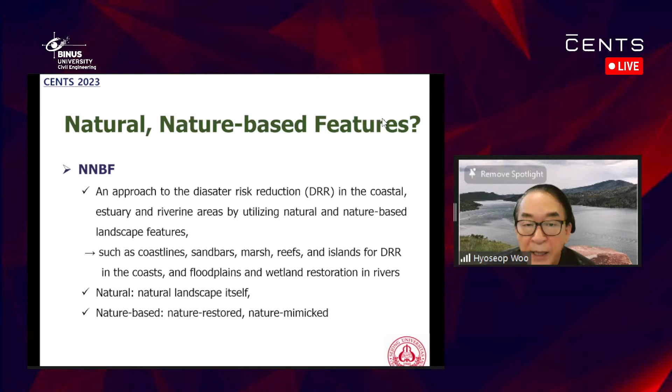And then, what is NNBF? I think some of you have already heard about this, but not all, because it's a very new concept introduced to us years ago. It is an approach to disaster risk reduction in coastal, estuary, and riverine areas by utilizing natural and nature-based features. In this case, 'features' means landscape features, such as natural coastal lines, sandbars, marshes, reefs, and islands for disaster risk reduction in coastal areas, and floodplains and wetland restoration in riverine areas.

So in these two concepts, we have two similar but different words. One is 'natural', the other is 'nature-based'. The first is natural landscape itself, and the second is nature restored or even nature mimicked.

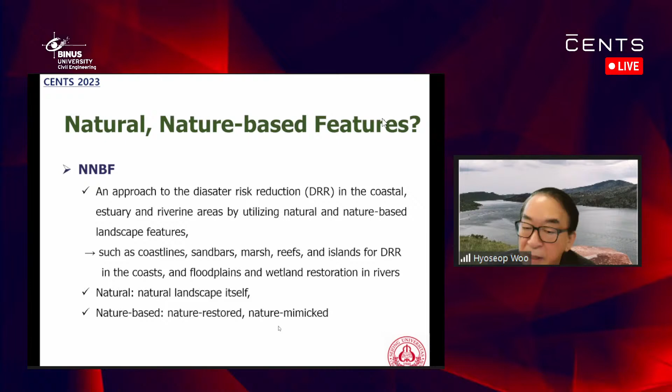Now the background of these two concepts. NBS, as I told you, was formally introduced in 2008 by IUCN, but its origination goes back to the 1990s, such as the 1992 Rio Environmental World Summit, where they accepted Agenda 21 regarding water. Then we had the Millennium Ecosystem Assessment over 5 years, and this concept was introduced in 2008. On the other hand, NNBF was introduced officially in 2021, jointly by the United States, Netherlands, England, Germany, Ireland, and the World Bank - so a very new concept.

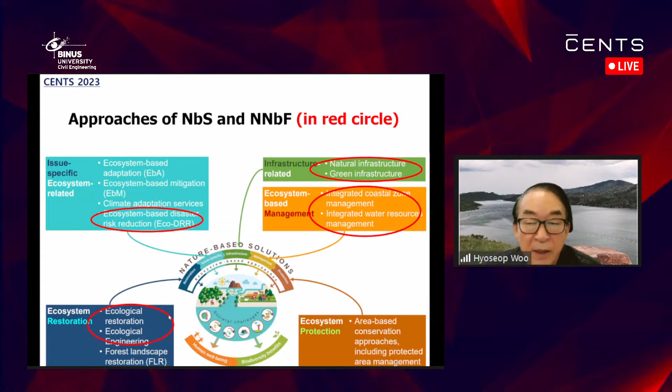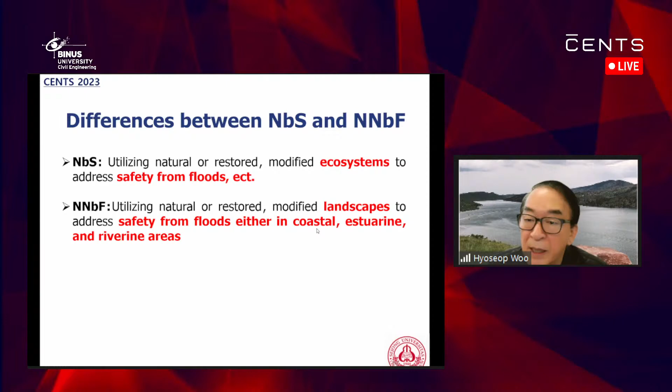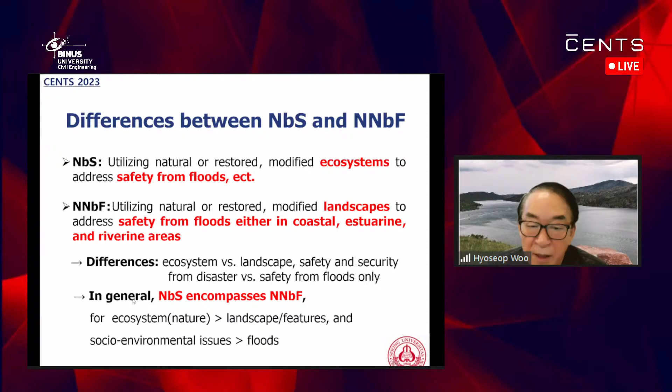I'd like to explain the differences and similarities between NBS and NNBF. NBS is the utilization of ecosystems, natural or nature-based, such as restored and modified, to address safety from floods and other social or environmental issues. But NNBF only focuses on water issues, flood issues, either in coastal, estuarine, or riverine areas. So the difference: NBS deals with ecosystems broadly, NNBF deals with specific landscapes. NBS focuses on safety and security generally, but NNBF only on safety from floods.

So I may say NBS in general encompasses NNBF. I'd like to spend less than 10 minutes introducing various concepts that already exist and sound similar to NBS and NNBF, starting from ecological engineering and even close-to-nature river work techniques.

A similar concept is ecological engineering. This is not a practice but an academic discipline started in the 1960s in the United States. A typical example dealt with in this discipline is constructed wetlands like this, and green roofs. I won't go into further detail.

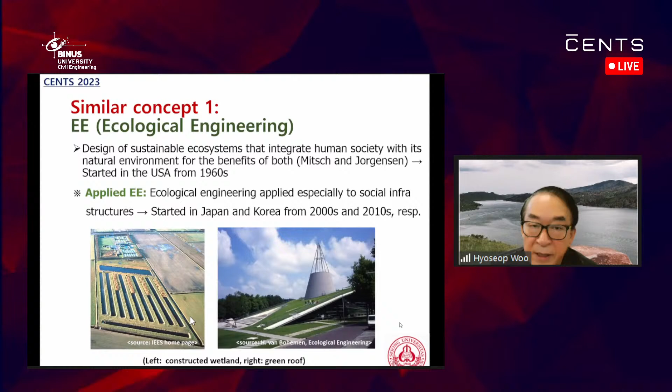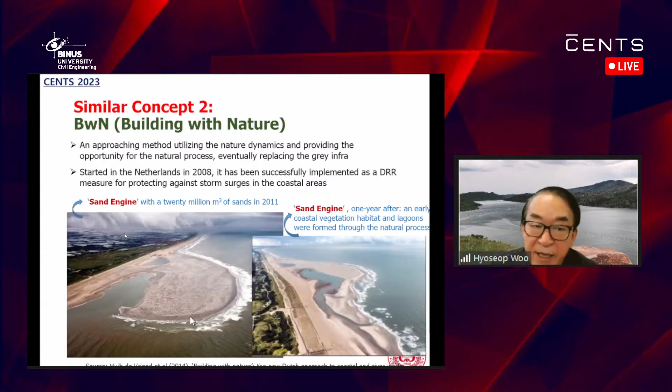Second, a similar concept is BWN, Building with Nature. Look at this - this is a Dutch practice. Instead of spreading beach sand along the coastline to protect it against storm surge, they put a huge amount of sand delivered from the deep ocean. Then natural wind, waves, and even storm surge spread this dump of sediment along the coastline. So they call it the sand engine. This is another practice.

Then there's a well-known concept, green infrastructure. But there are two distinct meanings of this term. One, the narrow meaning, is how to treat storm water in quantity and quality using nature-mimicking processes such as bioswales, permeable pavements, green streets, etc.

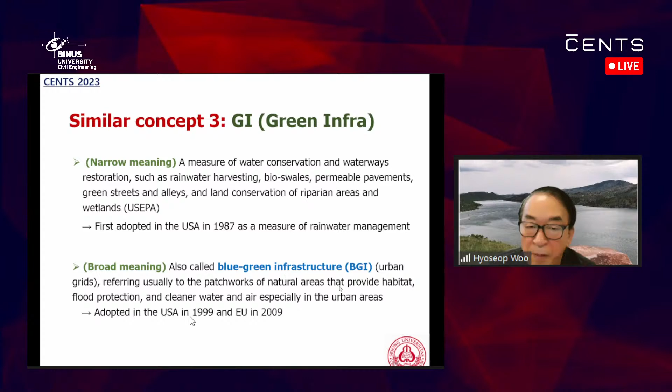If I expand the meaning of green infrastructure, we can also call it blue-green infrastructure - a patchwork of natural areas that provide habitat, flood protection, and more, especially in urban areas. I'd like to explain this with a relevant diagram showing examples of green infrastructure applied in urban areas, and the patchworks of green areas and blue areas. You have a built environment, urban areas, and a natural environment, and they try to integrate these through patchwork networks of green and blue.

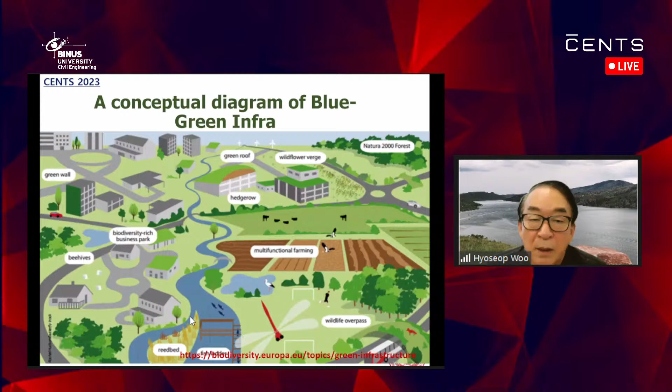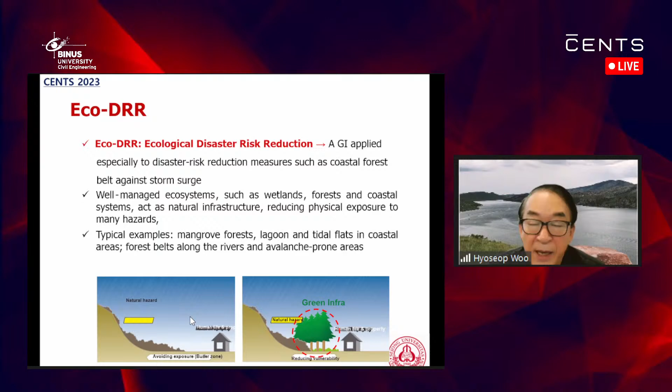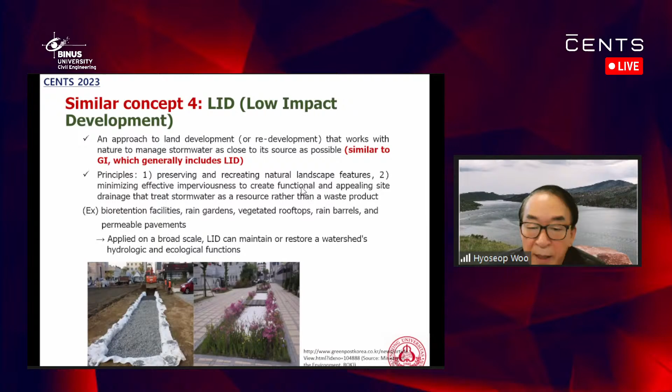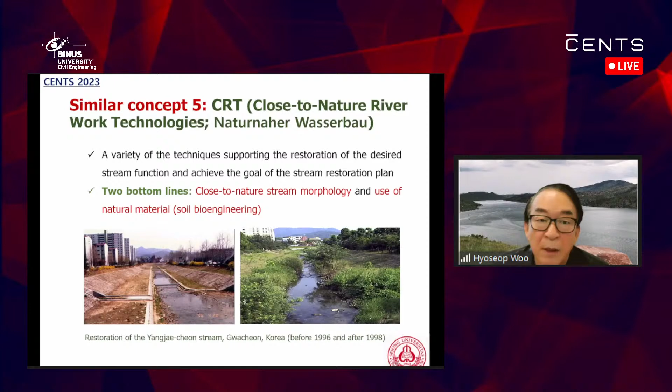I'd like to show you briefly numerous examples of different spectrum, different categories. In this case, I'll focus on NNBF.

We're trying to get some points. Can I continue? Yeah, sure.

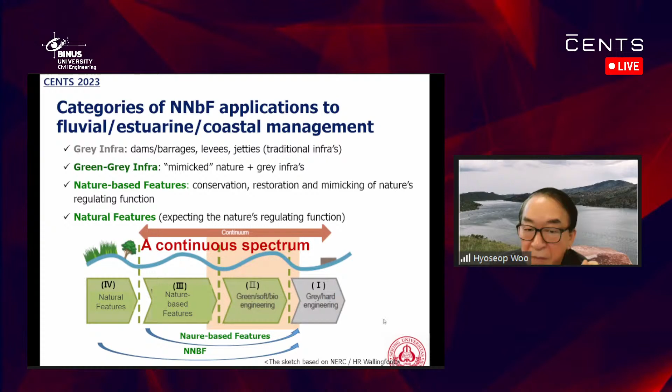Then eventually we can consider the last category, natural features. So if I consider these three, we can say nature-based features. But if I combine natural itself, then all of these are NNBF, natural and nature-based features. So there are four categories: 1, 2, 3, 4. I'd like to explain some examples for each category. This categorization should be continuous, not cut — I'd say a continuous spectrum.

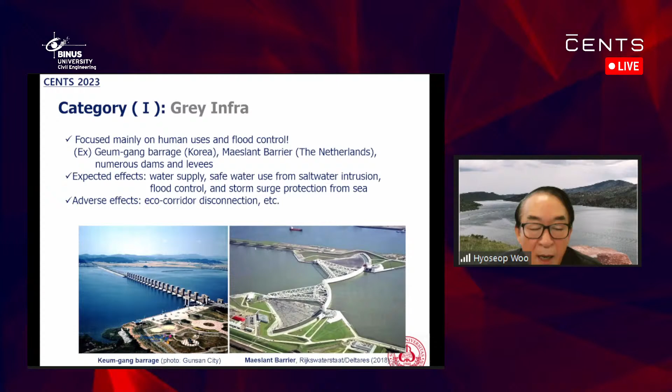This is a good example. You know that it's in category 1, gray infrastructure. We can make, by high tech and engineering technologies, this kind of barrage in Korea and in the Netherlands.

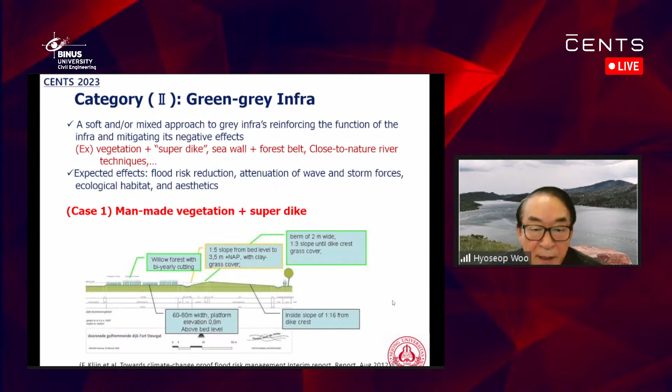This is another example found in Korea. Here we have a breakwater and dikes to protect the inside against storms. Then, in addition, we make this kind of tree corridor, forest corridor, like in these real pictures, so that even some parts of storm water could overflow this levee. This forest belt can protect the inside urban areas by absorbing the overflowing storm water.

You see, this is all practice in Korea. They also made this kind of coastline forest belt to protect the inside, in this case paddy land.

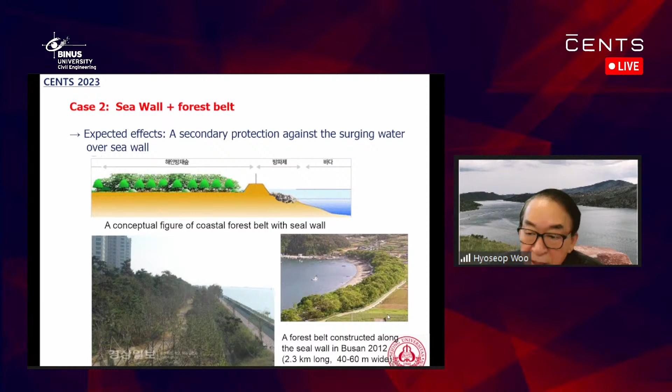You see another example, eco DRR. I already explained this one — this is where they planted trees on the levee, Ulsan levee, to protect it from erosion. It was 400 years old, and even then they planted trees like this.

This is a cluster, not a corridor, planted to protect villages located here against the straight coming flood torrents during flood times. This is a 1,000-year-old practice.

Case 4 is close-to-nature river works techniques. This is German practice: instead of concrete revetment for protecting the stream bank, they use living material — willow trees, this and this.

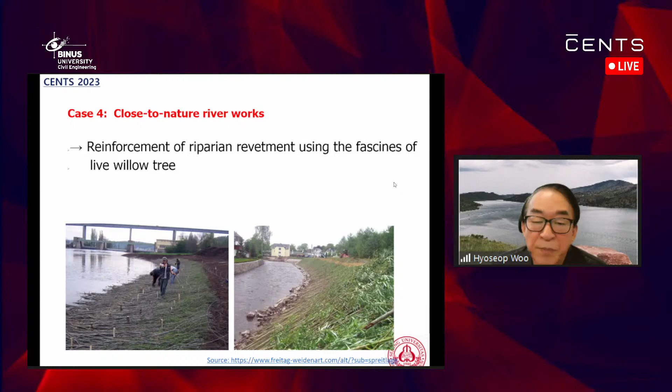And this is a very common practice in Korea. So we have this to this. Then category 3 is nature-based features.

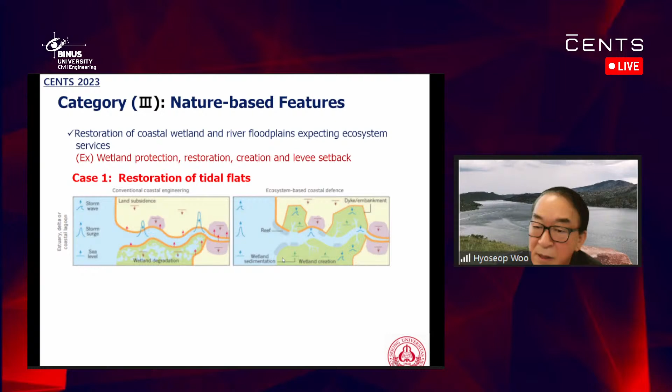One example could be found in restoration of tidal flats. You see, they made a seaside dike at the estuary river into the ocean, but because of these dikes the channel narrowed, and storm peak could increase because of this narrowness. Instead of this, they set back the levee backward like this, and even removed the levee here to absorb the storm surge peak, so that at the same time they can expect habitat functions from this restored wetland.

This is an example of category 3, and this shows the actual views of that practice.

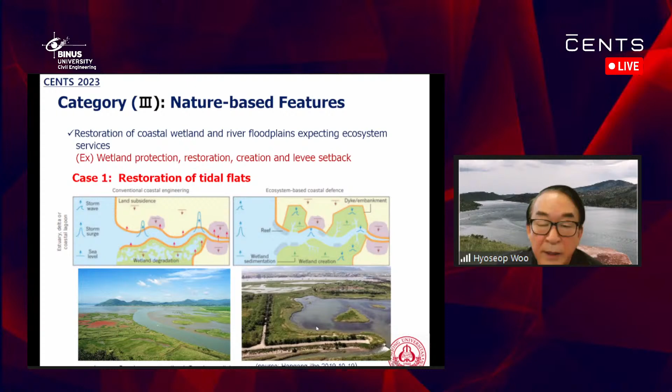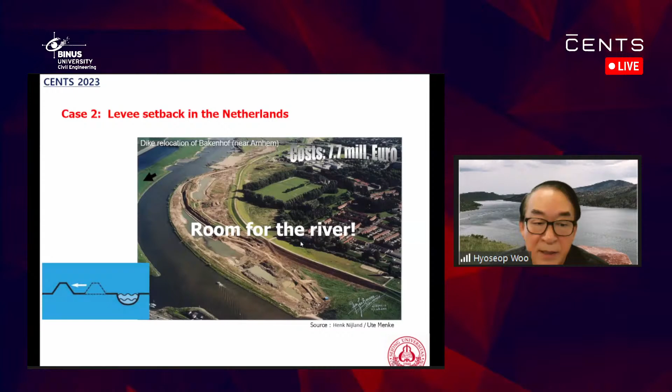This is a setback. Levee setback is very common in Europe, in the Netherlands. There was a levee here; they set it back to this place so that they could restore this floodplain. This is a good example of their practice — the Room for the River, a very well-known practice from the Netherlands.

This is the same case, levee setback, but in Korea on a small scale. We may also consider removal of levees. For example, we have a small stream here where they constructed a levee on both sides. This portion of the levee is only for this small, narrow paddy land. By removing this levee, they can make more room for the river and also restore this land, which was originally part of the floodplain.

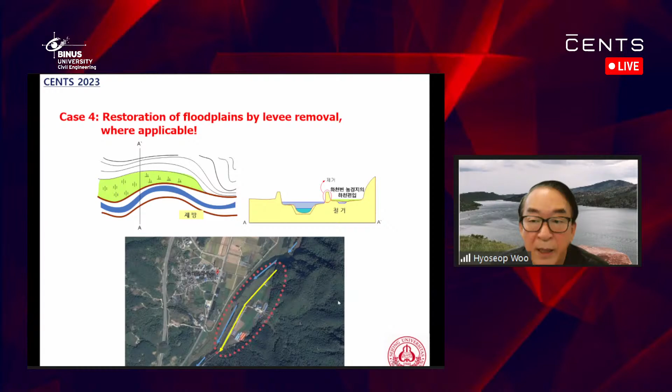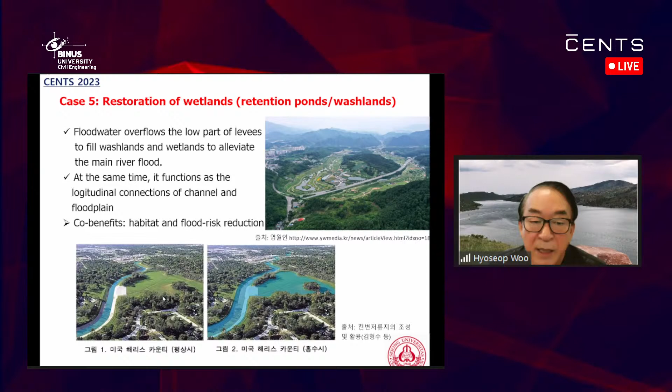Then retention ponds, so-called washlands, are important. This is actual work in Korea, and this is another example in the United States.

The last category is just conservation of nature itself to get benefit from that nature — natural features. This is a good example of a mangrove forest belt; many of you already know this, perhaps better than I do. In 2020 we had cyclone Amphan, and because of this mangrove tree forest belt along the coastline, they had less damage than expected.

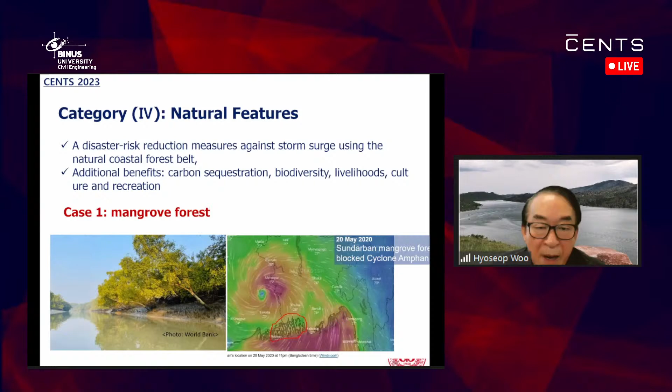Those without mangrove tree forest belt.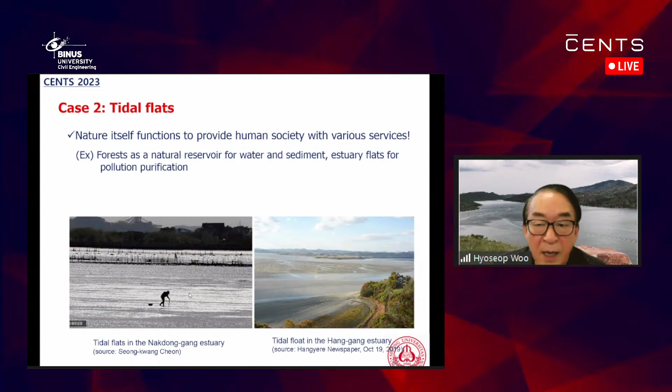And then tidal flats are also important. It's a part of coastal lines, but by conservation of this tidal flat, we expect benefits in terms of flood alleviation. And this is a good tidal flat in Korea, and other pictures in Korea.

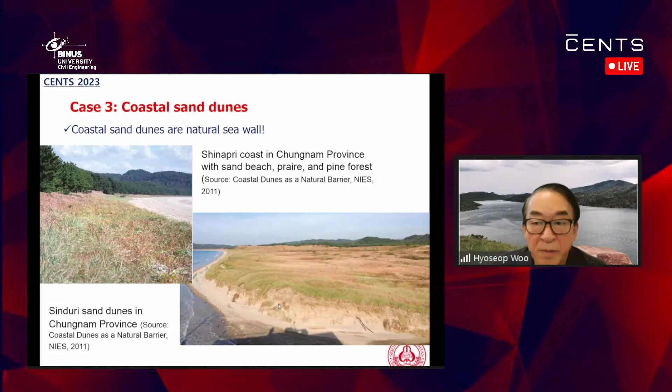Even coastal sand dunes are important to protect. Look at this. This is sand dunes on the west coast of Korea. This is another sand dune on the west coast of Korea. And this is a good diagram showing how useful natural sand dunes are along the coastal line.

Suppose we have an artificial retaining wall here. It's very susceptible to being destroyed by storms because the foundation itself is naturally very weak. So it could end up like this. But when you consider the natural sand dune, it's very flexible, so that once it is modified or changed in shape, it could be restored. This is an example in Korea of destruction of a retaining wall by the action of waves and storm surges.

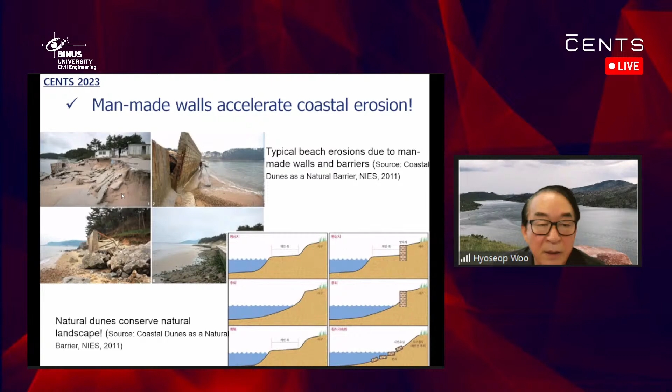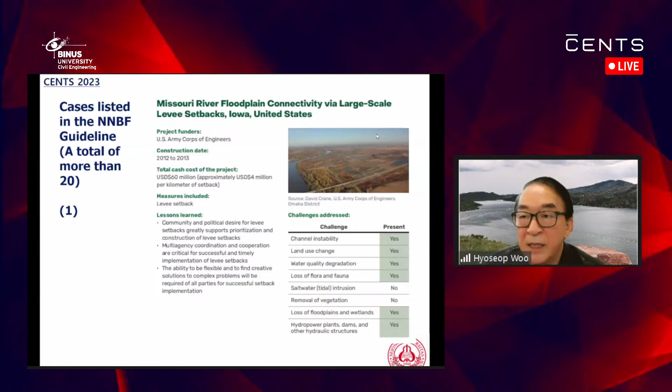There are many other examples which you find in the NNBF guidelines. This is one example of a levee setback in the United States. And this is another example, a side channel construction in the Netherlands, to provide flood protection as well as habitat restoration co-benefits.

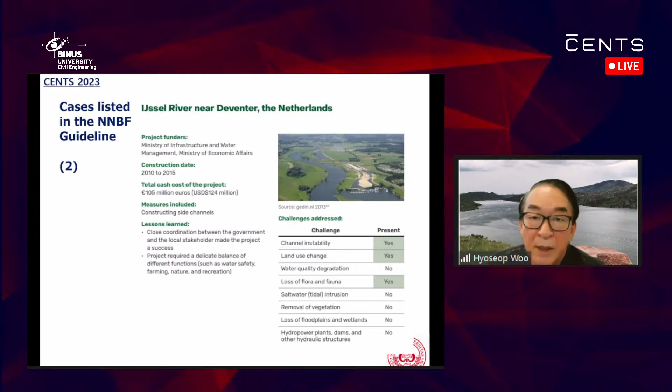Okay, I think we've spent half an hour, so I need to conclude my speech this time. Again, NBS is an umbrella concept where we harness natural processes and ecosystem services to address our social and environmental challenges in the water sector, actually in every sector. So I may say all approaches based on nature — in this case, nature means ecosystem — are nature-based solutions.

On the other hand, NNBF, natural and nature-based features, is the utilization of natural or restored or modified landscapes to address safety from floods. We focus only on safety from floods, either in coastal, estuarine, and riverine areas. NNBF was newly introduced in 2021, but the core concept is not new. So we may say NNBF is a good subset of NBS.

We may consider there is a continuous spectrum of river and coastal line management in terms of flood protection. First we used gray infrastructure, then green plus gray infrastructure, but still we need to use nature-based features, and eventually we need to protect and conserve nature itself, natural features. In most cases, NNBF shows better efficiency when aligned with conventional gray infrastructure. So in our civil engineering discipline, we still need to learn more techniques, technologies, and science for how to design better infrastructure using so-called gray methods.

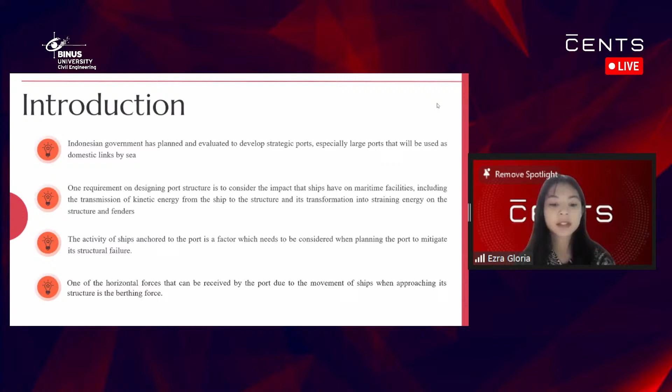The horizontal forces that can be received by the port itself, due to the movement of ships when approaching its structure, is the berthing force. To achieve this, the SPH method can be used.

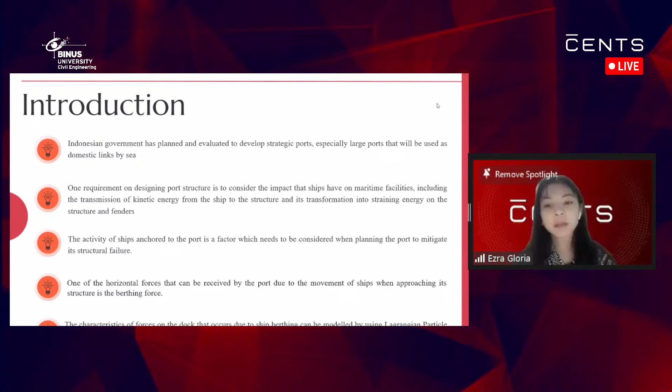The characteristic of the force on the dock that occurs due to ship berthing can be modeled using the Lagrangian particle method, specifically using the Smoothed Particle Hydrodynamics or SPH method, using the DualSPHysics software.

The method used in this research: firstly, the berthing velocity cases applied in this research are different cases, which are 0.2 meter per second, 0.3 meter per second, 0.5 meter per second, 0.6 meter per second, and the last one is 0.8 meter per second. These berthing velocities are chosen without concerning the sea current.

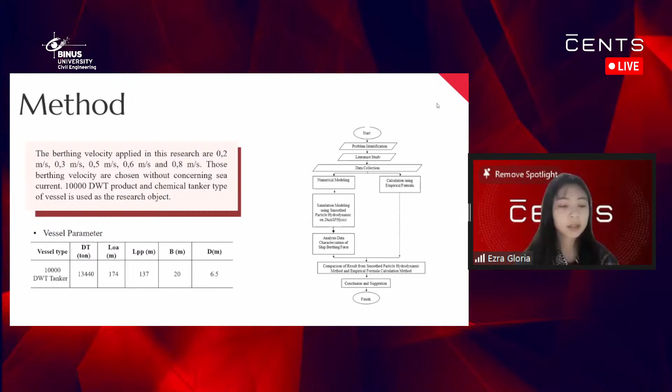The object used as the ship in this research is a 10,000 deadweight tonnage product and chemical tanker type of vessel. These are the vessel parameters used for the research, which I took from PIANC Standard.

The flow of the research I conducted is by doing numerical modeling using the SPH method, and also doing calculation using the empirical formula, then at the end comparing both results from Smoothed Particle Hydrodynamics and the empirical formula method, and coming to conclusions.

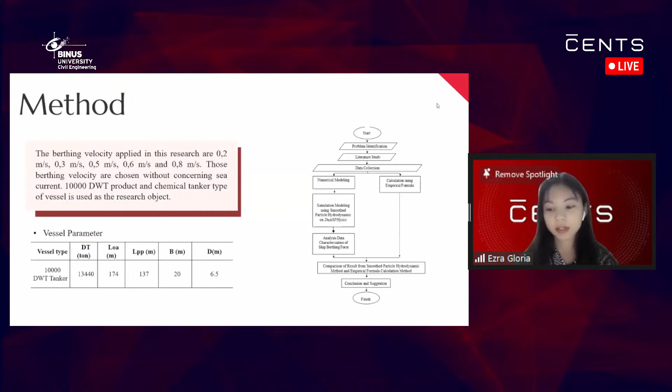Briefly about the Smoothed Particle Hydrodynamics or SPH method in DualSPHysics: SPH is basically a numerical method of simulating fluid flow. It is a method to represent fluid as a set of particles.

In DualSPHysics, it's a specific software that employs SPH to simulate fluid dynamics, including interactions with structures like waves in the context of ship berthing. Now let's come to the results and discussion of the research.

From the calculation using the empirical formula, I conducted calculations with the 5 different berthing velocity cases mentioned before. As can be seen from the table, it yields different berthing energy and different berthing forces, depending on the case of berthing velocity.

This result proves that not only the specifications and dimensions of the ships, but also the speed of the vessels when maneuvering at the dock, could affect the magnitude of the ship's impact force value.

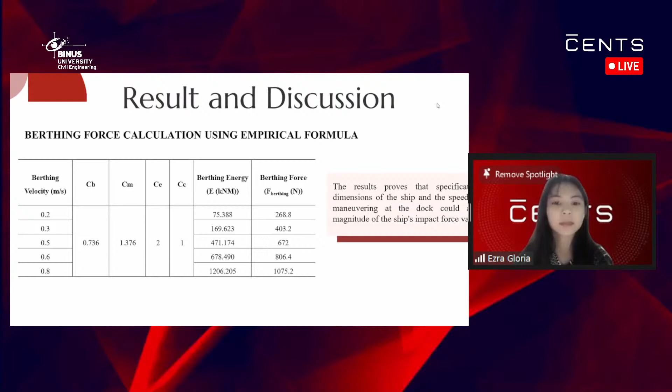Next, the modeling of berthing force using the Smoothed Particle Hydrodynamics or SPH method using DualSPHysics software. From these 5 case variations of berthing velocity, it is conducted by the Smoothed Particle Hydrodynamics method.

We can see from this graph that there are 5 different graphs, respectively, for each of the cases.

From this graph, we can see data generated by modeling using the Smoothed Particle Hydrodynamics method. It is found in the form of positive and negative values, which conclude that the value with positive notation is the amount of force due to the impact of the ships when colliding with the dock, while the value with negative notation is the amount of force when the ships bounce back from the collision.

We can see that the peak positive value in these graphs is the critical value of the berthing force, which we take as the value conducted by the SPH method.

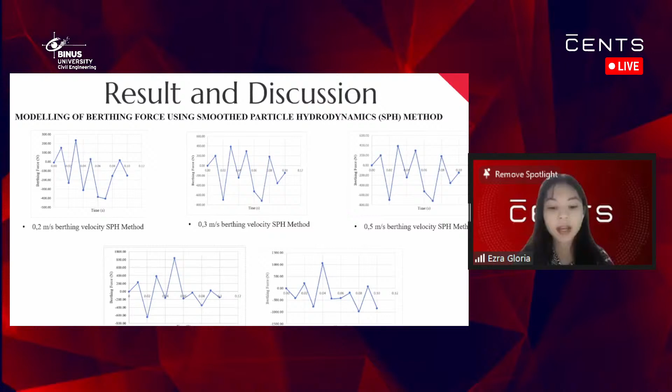So we can see again from these graphs that the force characteristic is that the ship hits the dock with a horizontal force and reaches its maximum impact at the first 0.03 to 0.05 seconds when the ship collides with the dock, and then the ship bounces back and hits again the port with a force magnitude that is lower than the maximum magnitude that happens before.

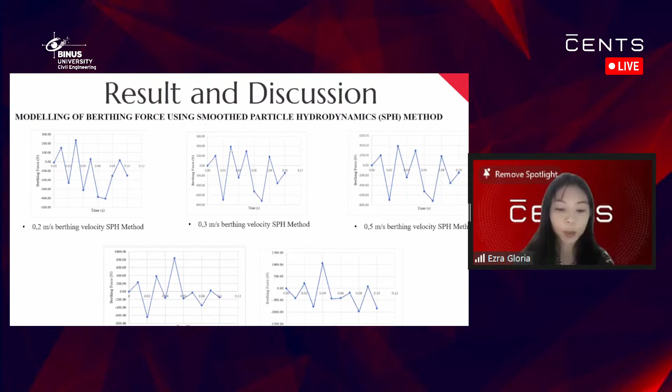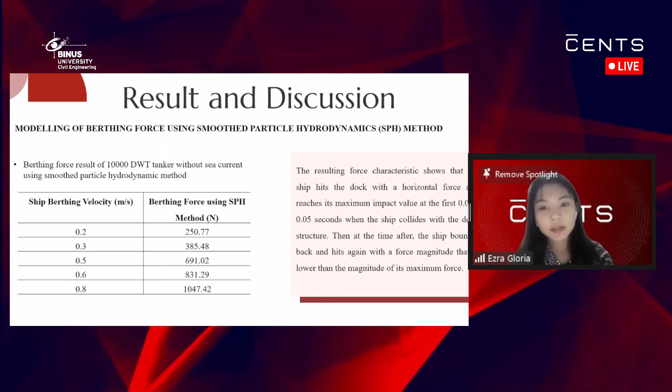So we can put it on the table that the berthing force result of a 10,000 deadweight tonnage tanker, without sea current, using the smoothed particle hydrodynamic method, on its respective ship berthing velocity, is as shown on the table. The resulting force characteristic shows that the ship hits the dock with a horizontal force and reaches its maximum impact value at the first 0.03 to 0.05 seconds when the ship collides with the dock structure, as I've mentioned before.

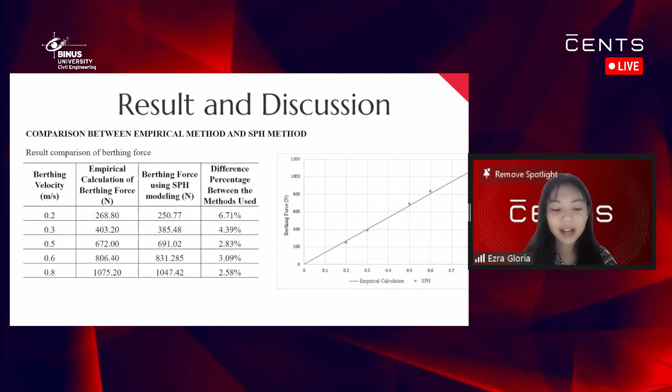So then we can compare both of the results, from the empirical method and from the SPH method. We can see that the empirical calculation of berthing force and the berthing force that we have using SPH modeling shows a slightly different percentage between both of the methods used. We can see how both the SPH method and the empirical formula show a very slight difference in percentage.

So we can conclude that, firstly, the greater impact energy received by the dock from the ship berthing is influenced by the magnitude of the speed of the ship, and the berthing force that the dock receives from a 10,000 deadweight tonnage vessel reaches its maximum value at 0.03 to 0.05 seconds initially when the ship first collides with the dock structure.

And we can see that both approaches, from the smoothed particle hydrodynamics and from the empirical equations, show a similar correlation between berthing velocity and berthing force, with the difference of both approaches relatively low, less than 10%. And also in this conclusion, I really love to mention, to underline the importance of integrating various domains in engineering, making a collaborative approach to yield innovative and effective solutions to various challenges in different domains of engineering.

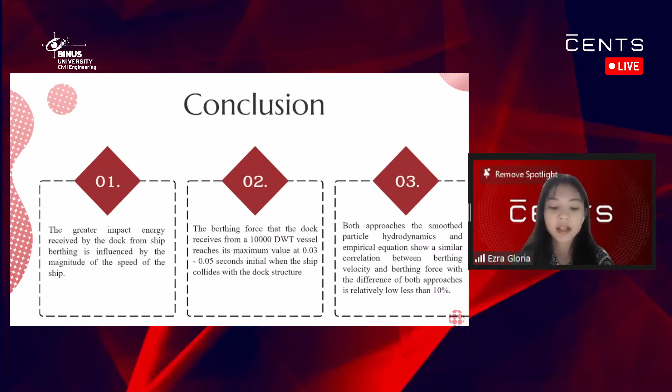So in my case, in this discussion, I believe that it is an innovative approach to make a relationship in the civil engineering field, but not only in civil engineering, but also in shipbuilding, or maybe naval architecture, as this type of research can help ensure the design of both the ships and the port to withstand the force, and ensure the safety of both the port and ship designs.

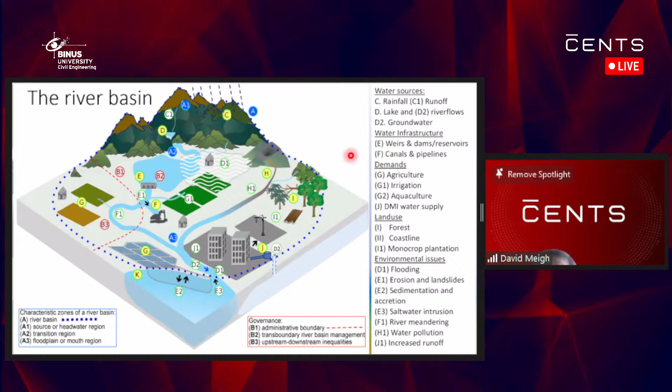There are environmental issues: flooding, erosion and landslides, sedimentation and accretion of sediments, saltwater intrusion, river meandering, water pollution, increased runoff. This shows you many of the different issues that have to be brought together in managing the water within a river basin. I've been through this list, and there's something I've left out that's very important, and I'll talk about it later - and that's climate change.

So I'll first of all go to one of my first inputs in Indonesia, which was in Banda Aceh as part of the Aceh Design Unit and Provincial Plan, 84 to 88. And perhaps we were a little ahead of the Indonesian government in that we produced a provincial plan based on water resource development areas. You can see them here - this is Krung Aceh, and this is Krung Baro Tiro. This is Pusangan, this is Jambuaya and Krung Pasay.

This one is Tamiang, Alas here. I think this is Kluit. Is this Marabo, or this may be Marabo? I can't remember. And then we have Tanom here. So I've missed two out because I can't remember them, but it was some time ago.

What we did was identify existing irrigation schemes, propose new irrigation schemes, document the water supply schemes, and look at existing and potential hydropower schemes. At the same time, our group was training a provincial irrigation team in planning and design, going to the field with them doing site investigations, planning, and design. We also visited the Kabupaten offices to help with design, construction supervision, and operation and maintenance, organizing everything on a river basin basis.

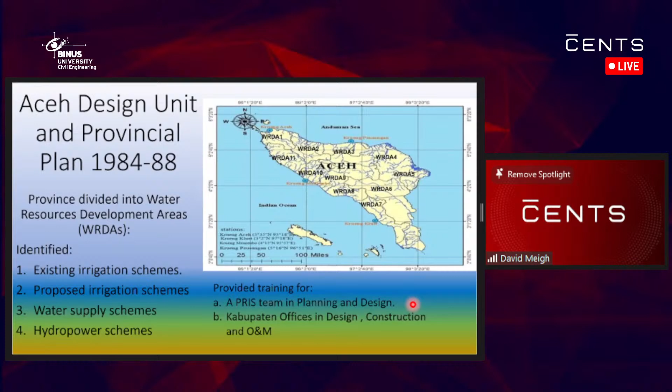So that was my first experience. I went back to Aceh after the tsunami, and we had a project to rebuild 94 small irrigation schemes, mainly in this area, with some in Nias as well. These were about half the irrigation schemes in the province, so you can see there were very many. It was interesting to go back to Aceh after something like 15 years.

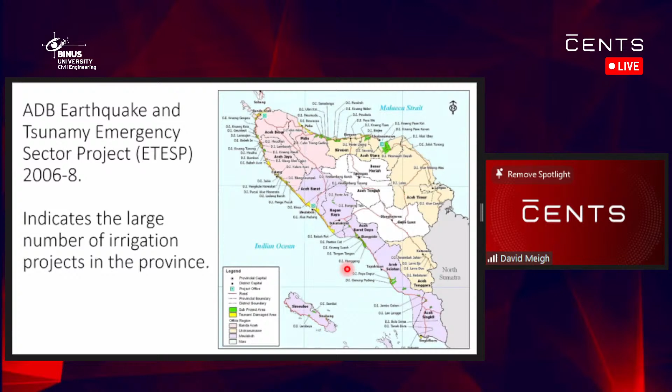My next input was more formal water resource management: the Tulang Bawang and Mesuji River Basin Master Plan. I've just shown Tulang Bawang here to keep it simple, but this part of Lampung is very agricultural, so the planning was very much oriented towards agriculture.

Perhaps the boundaries aren't very well marked, but here you can see we had 7 sub-basins: Tulang Bawang, Way Kanan, Way Kiri, Way Sungkai, Way Rarem and Way Besai, Way Umpu, and Bahuga. As a cross-reference, we had what were called agroecological zones, where we could plan the agriculture and irrigated agriculture. I don't want to go through every one, but they were split into mountain zones, hills, plains, and alluvial floodplains.

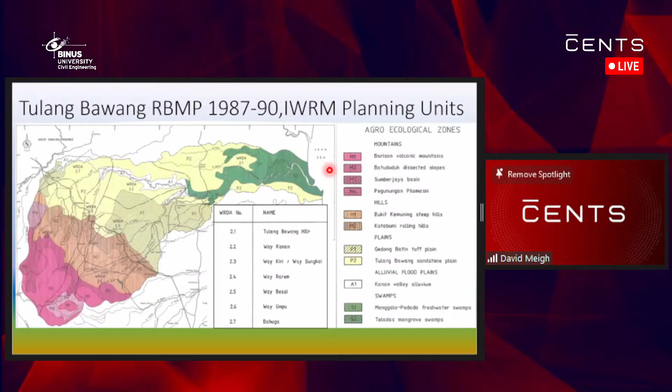Because the project was with the Directorate General of Water Resources, we also focused heavily on irrigation development. One of the firsts in Indonesia was that we built a water resource management model of the basin. We were involved with DHI, who did the basin model, and their WRMM model was the forerunner of Mike Basin, which they sold all around the world and never gave Binnie and Partners a share.

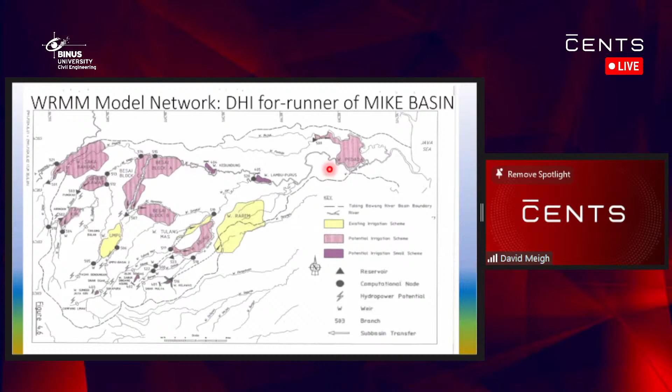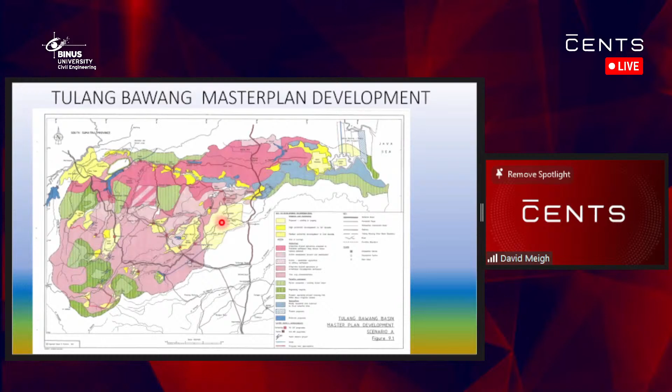We ended up with very complicated looking maps in Technicolor, showing all our proposals for the first 10 years, and another map for the second 10 years. You can see we've got the hill zone here and conservation areas, and here we've got the prawn farms, with the blue areas being irrigation schemes. Actually, this part of Lampung is not very conducive to irrigation, so we had to wait till we got down to the floodplain of the Tulang Bawang River before we could find any substantial areas. The yellow ones were schemes we looked at but did not find to be so economic.

So we get to the 1990s, and the Director General of Water Resources becomes very interested in converting their organization into river basin development units. Each major river basin in Indonesia now has a balai. They've developed river basin boundaries, and for basins spanning more than one province, they have what's called the Balai Besar Wilayah Sungai, BBWS. If the river basin is just in one province, it's called the Balai Wilayah Sungai.

This enabled the development of a basin pola, which is really getting together all the river basin stakeholders to find out their concerns and future planning, and how they can integrate their work together so you can have multi-purpose projects, not just one agency having their own separate project and another agency wanting their separate project. If there's a benefit in combining, such as building a dam for water supply, irrigation, and hydropower, then they should come together.

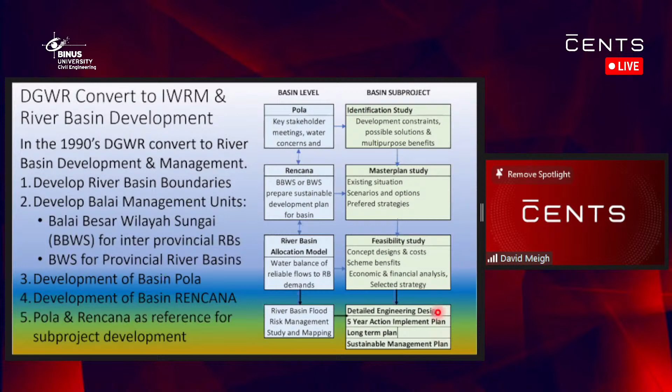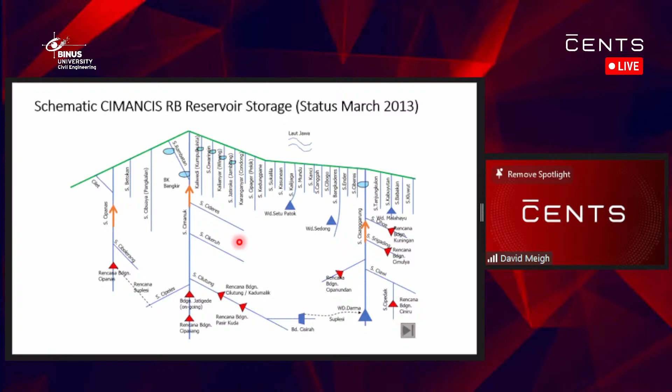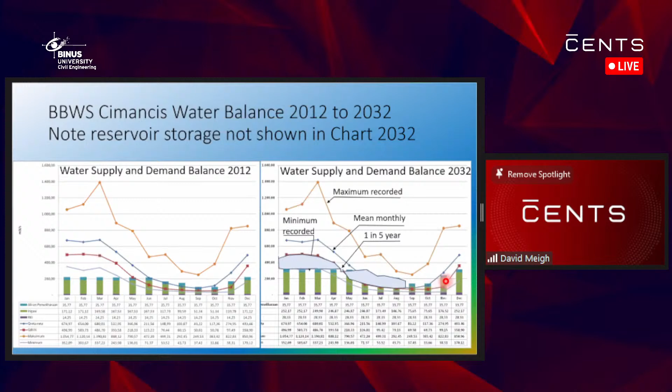So if I show you, this shows the excess water we have in the wet season in the 1 in 5 year situation. So if we can store this, at least for these months, we can satisfy all demand. These volumes are similar. But what are we going to do here? It probably means that people growing rice here, some of them have to grow other crops or reduce their demands, because even in November was short, and October.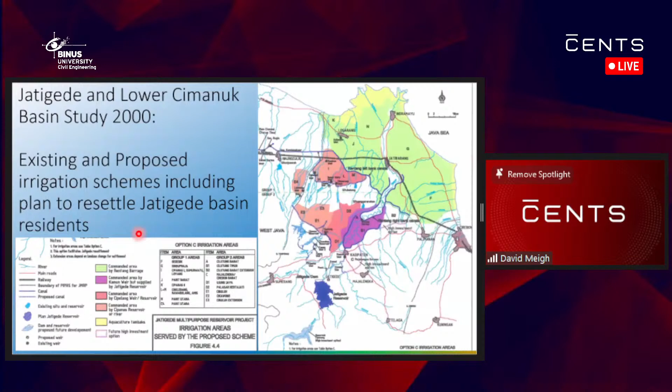I came back here because although that was mainly irrigation, I've also been working with the ADB on this TA, the preparation of an enhanced water security investment project, where we looked at the whole of the Lower Cimanuk, with water coming from Jatigede through here and towards Cirebon.

I found there's an existing reservoir at Cirebon, and there's quite a good new site, so I thought maybe they were better off being supplied here. That was one option, as well as a pipeline here. I also came up with the idea of dropping water from the dam and picking it up here, then supplying these towns from Cipanas. But I believe now it's going to all be supplied by Jatigede through a pipeline going up here.

We also looked at flood risk. This shows the flooding areas in this area, some quite severe, very high risk, some medium - we don't seem to have many yellow areas for some reason. We also looked at the Cisanggarung, and you can see it's the lower part of the Cisanggarung, as well as a few little areas along the main river course that suffer from flooding.

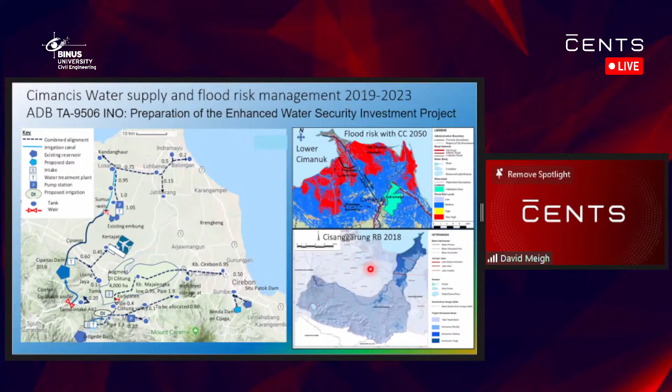River basins don't have to be independent. If you have one river basin with a lot of water and another with a lot of development but not much water, you can have an interbasin transfer. This is a project I worked on in Vietnam for 10 years, off and on, doing feasibility and different studies, and finally producing a management plan.

You can see the Be River here has 3 large dams for hydropower, and these large dams mean the dry season flow increased from about 12 cumecs to about 54 cumecs. We were involved in suggesting the design of a barrage here and a 42-kilometer transfer canal. This could take off 75 cubic meters a second, giving 5 to this province for their development, either irrigation or industrial, and then 15 cumecs for this new industrial city, which was growing very rapidly.

Vietnam is developing incredibly quickly. 55 cumecs went into this reservoir here. We increased the reliability of flow to this existing irrigation area, and proposed 2 new areas here and here. We also provided a transfer to Ho Chi Minh City, previously Saigon, for 12.5 cumecs, and these areas also had DMI - domestic, municipal and industrial water needs - as well as irrigation needs.

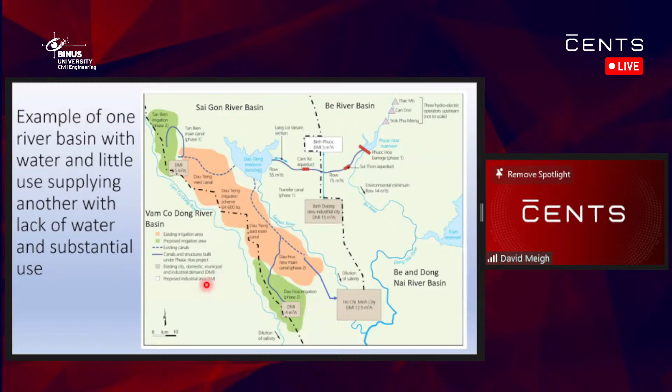Do I have a bit of time left? Sure, you just go on, Mr. David.

Okay, I'd just like to talk about climate change impact for Indonesia. You're going to have increased temperatures which will increase evapotranspiration and water demands. It'll make work outside more dangerous due to heat stroke, particularly for people like farmers, who'll have to work in the mornings and afternoons, not in the middle of the day. There's going to be increased storms causing more intense rainfall and runoff, increasing flood risk, erosion, landslides, and sedimentation. Sea level rise and storm surge will cause coastal erosion and saline inundation, reducing rice cultivation over about 1 million hectares by 2050. There will be increased pests and temperatures affecting forests, crops, and the health of all creatures, including humans.

So that's a list of things anticipated with climate change, and I'm afraid Indonesia may be in a very vulnerable situation.

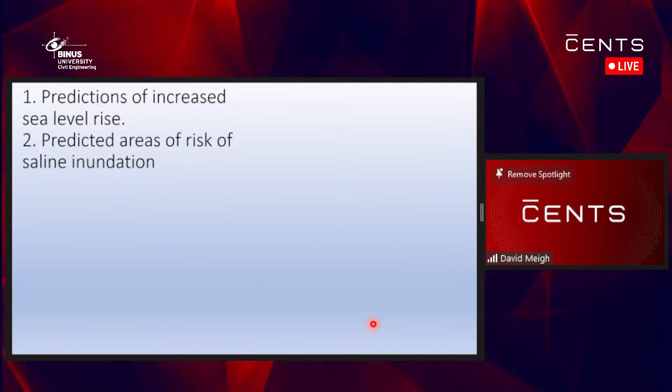If we look at predictions of increased sea level rise, by 2050 in the worst scenario we're talking about just over 0.5 meter rise. Other people are now predicting even higher rises, up to about 800 millimeters, so that could be a problem. And by 2100, we're up to 1.5 meters sea level rise.

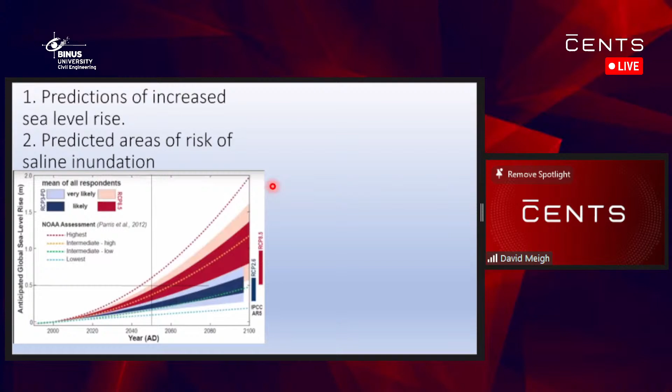When you add storm surge and waves on top of that, it means anywhere below 5 meters above sea level could be inundated by saline water, with increased erosion. I did a brief study of where land was below 5 meters that could be affected by sea level rise, particularly this area, because they also suffer a lot of typhoons.

When you have surges in Bangladesh, they can be up to 10 meters. Along the coast in Vietnam, about 3 or 4 meters. And we know the Mekong Delta is settling as well as suffering from erosion and tidal surge.

Rice is a big staple of diet in Indonesia, so this is a worrying trend, and you may find that importing rice becomes more and more expensive.

If I just go on, this is the last slide. I don't suppose many people noticed that about 2 or 3 months ago, thousands of baby penguins died in Antarctica because the ice broke up.

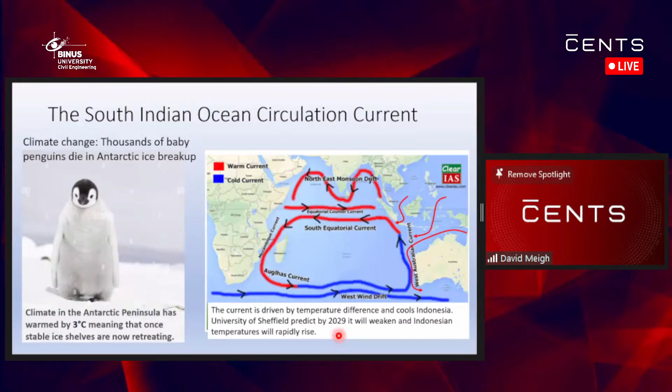And so that's me finished. Thank you very much for listening.

Okay, thank you, Mr. David, for the presentation about integrated water resource management, especially in river basin management. There are several questions for you, Mr. David. The first one is here, let me read it for you: in other countries, some rivers have completely dried up due to human use and temperature rise. Are there any ways to recover these dried up river basins, or is it only possible to prevent the dry up?

I think you find that in a lot of river basins, one reason they dry up is because the forest has been removed, and the soil cannot hold the water. The soil dries out very quickly. If you have a forest, particularly a tropical forest, the soil is almost permanently wet and holding water, and so is the biomass on top of it.

So you tend to get a reasonable dry season flow. But in places with a much hotter and drier climate, they routinely have dry rivers for 6 months of the year, and often water is taken from the bed of the river rather than the surface. My first project overseas was in Nigeria during a drought, building small dams to hold the 3-month wet season water so people could use it in the villages for the rest of the year.